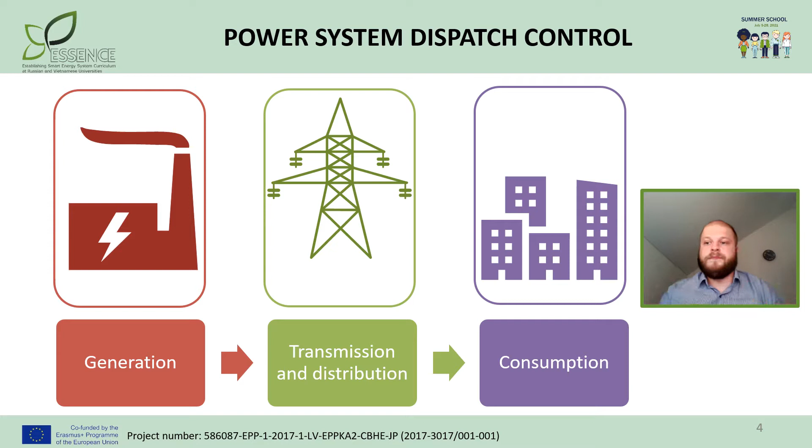Now let's talk about different power system states and some peculiar features of power system operation, because it provides a more detailed understanding of what actually are the requirements imposed for energy management systems and SCADA systems as well.

So let's start. In the normal operation state, typically all operation constraints of the power system are satisfied, indicating that generation is adequate to supply the existing total load demand and that no equipment is being overloaded or damaged for some reason. In these states, power generation reserve margins are sufficient to provide an adequate level of security with respect to stresses to which the system may be subjected, like short circuit current, extreme weather conditions, whatever. If the security level falls below some threshold of adequacy, or if the probability of the disturbance increases in some circumstances, then the system enters the alert state.

In this state, all constraints will still be satisfied but existing reserve margins would be such that some disturbance could result in a violation of some constraints. For example, equipment would be overloaded more or less severely above its rated capabilities. In insecure alert state, preventive actions can be taken to restore the system back to the normal state. If a sufficiently severe disturbance takes place before such preventive action can be taken, the system enters the emergency state.

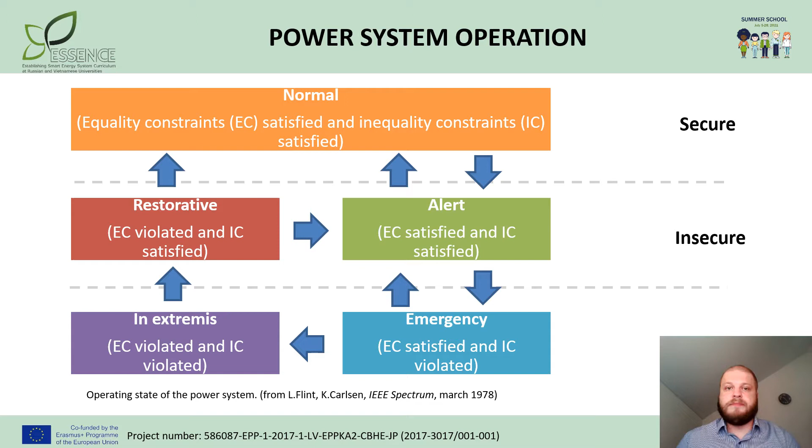The electric power system is undergoing dramatic transformations. Actually, you've learned about it a lot within the framework of multiple video lectures within the framework of our summer school. And it's worth noting that the emergence of renewable energy sources reflects these transformations. However, integrating these resources into the electric grid has proven to be difficult for two main reasons. These resources are uncertain and distributed.

When the power system increases in size, the number of substations, transformers, switchgear, and so on, their operation and interaction become more complicated. So it becomes essential to monitor this information simultaneously for the total system, which is called the energy control center. It's just like the building, the control room, where the power dispatch control engineering staff provides monitoring and control of the power system state.

A fundamental design feature of the dispatch control center or energy center is that it increases system reliability and economic feasibility. In other words, energy management is performed at the control center called the system control center, covering all of the possible issues dealing with conventional technologies like thermal power plants, network management, operation, maintenance, whatever, and including new energy sources which are distributed, storage, small-scale generation, renewable energy sources, and other active components of the power system.

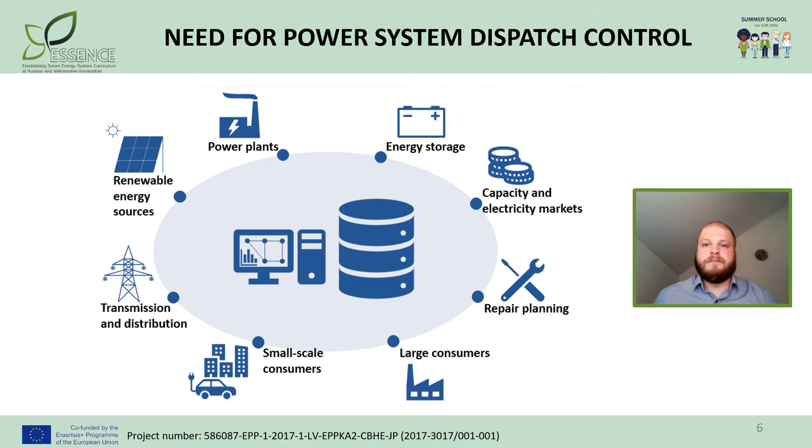A power transmission and distribution system is that portion of the power system that moves power from where it's produced to where it's consumed. Basically, it is the entire power system sans generators. The transmission and distribution system interconnects all the disparate parts of the power system and thus to a great extent determines the character of the system.

Beginning in the late 20th century and continuing into the 21st century, significant changes, advances, if perhaps not true breakthroughs, began to occur in several of the technologies that made up electric power systems. It became possible to build electric power systems fed by many more but individually smaller generation sites. No longer would there be thousands of times fewer generation stations than energy consumers. Conceivably, the ratio could be 1 to 1.

Such distributed power systems, in which power production is dispersed widely throughout the energy consumer base rather than concentrated at a few generation stations, as in a traditional power system, had different reliability, maintainability, and operability characteristics, as well as different economies of scale, which shaped their use differently from traditional power systems.

Neither type of system, traditional or distributed, is necessarily better. They are merely different. What seems clear is that the power system of the future will be neither one, but instead a hybrid mix of both, the effective interaction of transmission network and distribution network comprising multiple distributed generation sources and actively participating consumers.

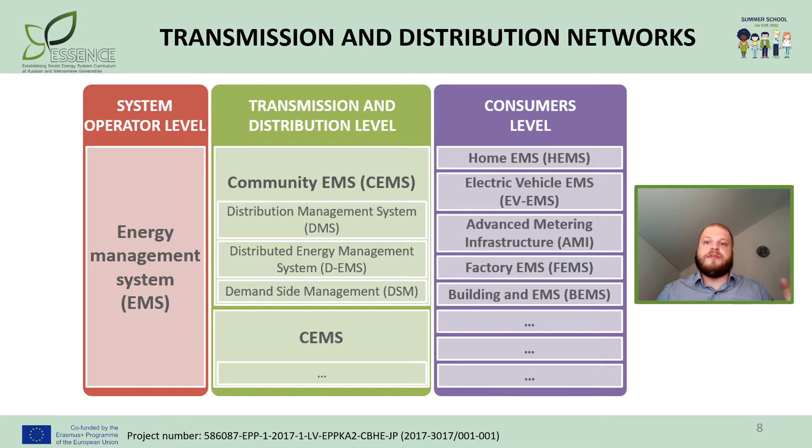So these systems are implemented at each level, and for this reason at each level these systems solve various tasks. The computer technology is referred to as SCADA EMS or EMS SCADA, and in these respects, the terminology EMS excludes the monitoring and control functions, but more specifically refers to the collective suite of power network applications and to the generation control and scheduling applications, both for generators and consumers.

Now let's talk about SCADA. Actually, SCADA is an acronym for Supervisory Control and Data Acquisition. Supervisory control and data acquisition systems are used to monitor and control a plant or equipment in industries such as telecommunications, water management, waste control, energy, whatever. A typical SCADA system comprises signal hardware, controllers, software, networks, and communications.

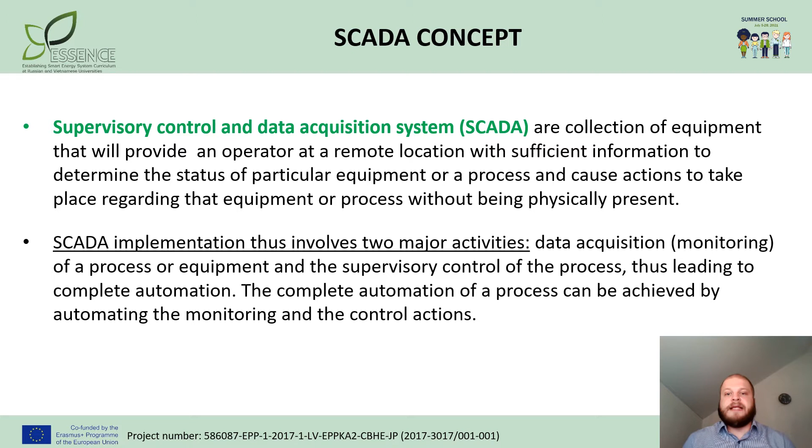A supervisory control and data acquisition system is a system in which individual messages or commands are sent to the external world. It provides host control functions for the supervisor to control and define settings of equipment or the system in general.

When talking about the SCADA concept, it's worth noting some basic functions and technical requirements imposed on these very specific systems in order to be able to implement them for power system monitoring and control. Well, the first point worth noting is data acquisition, converting, and processing.

First of all, the systems you need to monitor, I mean the power systems, are much more complex than just one machine with one output like capacity or electric current. So a real-life SCADA system needs to monitor hundreds or thousands of sensors. Some sensors measure inputs into the system, for example, water flowing into a reservoir for hydropower plants. Some sensors measure outputs like voltage, current, power system frequency.

Some of those sensors measure simple events that can be detected by a straightforward on-off switch called a discrete input or digital input. In real life, discrete inputs are used to measure simple states like whether equipment is on or off, or tripwire alarms like a power failure at a critical facility. From the point of view of the power system, a discrete input could refer to the state of the circuit breaker, switched on or switched off, which is very useful to monitor the topology, the configuration of the power system in general.

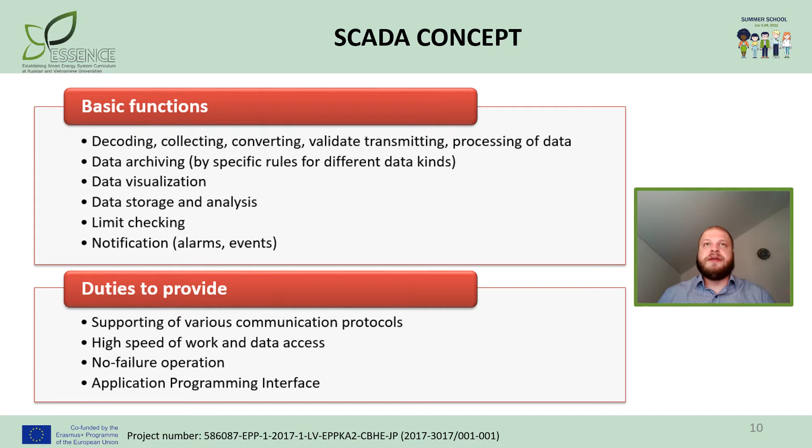The master presents a comprehensive view of the entire management system and presents more detail in response to user requests. The master also performs data processing on information gathered from sensors. It maintains report logs and summarizes historical trends. An advanced SCADA master can add a great deal of intelligence and automation to your system management, making your job much easier and your solutions more justified.

The human-machine interface is an integral part of the system that operators use to interact with SCADA, while the larger SCADA system does the work of collecting and storing SCADA data and controlling equipment. Human-machine interfaces typically feature screens and ideally user-friendly dashboards and controls. They may use graphics and visualization to make data and features easier to use and understand.

A human-machine interface is an essential element of a SCADA system since it's what you use to interact with, manage, and control the system. Without a human-machine interface, you could not take advantage of many useful features of SCADA. The SCADA system, on the other hand, provides the actual functionality. Human-machine interfaces and SCADA are often referenced together because they are part of a very big and complex system.

Just imagine the big data flow when we acquire and collect data from various sensors and monitoring systems. So it's absolutely obvious that the dispatcher, the engineering staff controlling this zone of the power system, will never be able to process and interpret all the data from all of the sensors and systems. For this reason, automated data processing, generalization, and visualization are in great demand for adequate and effective control of the power system.

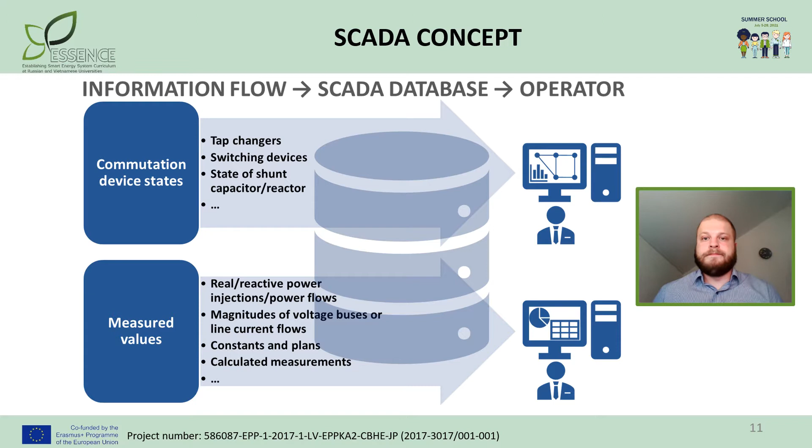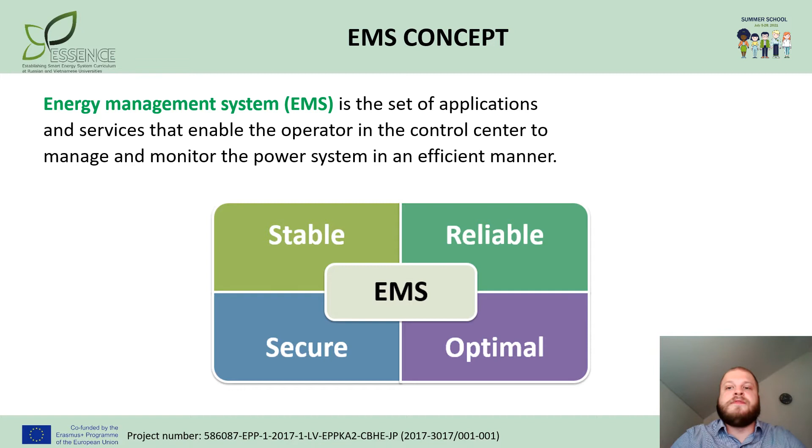An energy management system is usually a collection of computer-aided tools used by operators of electric facilities to monitor, control, and optimize the performance of the generation, transmission, or distribution system. Different computer-aided tools are implemented, from short-time control modules to scheduling or commitment of power production units on a day-week basis. EMS has the objective of maximizing system performance by monitoring and control functions, which require a centralized system of data collection and decision-making procedures.

EMS are automation systems that collect energy measurement data from the field and make it available to the users through graphics, online monitoring tools, energy quality analyzers, thus enabling the management of energy resources.

So EMS capabilities include monitoring and control of the complete power system, validation of data, monitoring power system operation mode indicators, sending control commands, and communication with power industry facilities, display of measured and computing data, operating the system within the framework of the limits, tracking some energy balance, and even restoration of the power system after emergency.

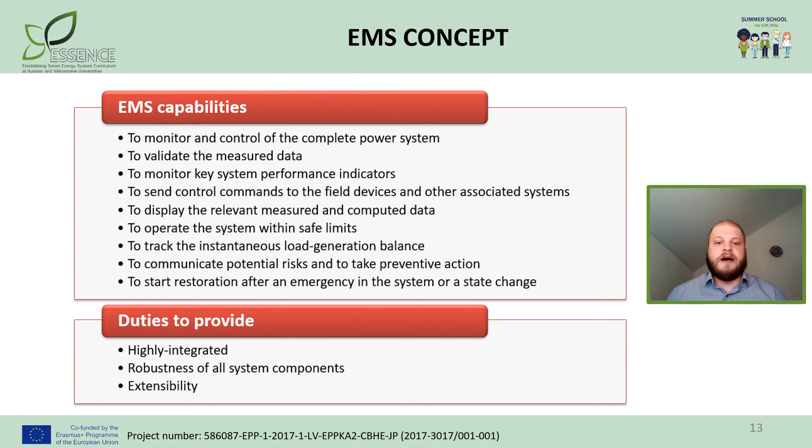Well, as I have already mentioned, energy management systems are of crucial importance not just for the power system control in emergency mode or normal operation modes, but for separate and individual power system facilities. For example, photovoltaic power plants. They are of great importance for transmission and distribution system operators, for owners of power system facilities.

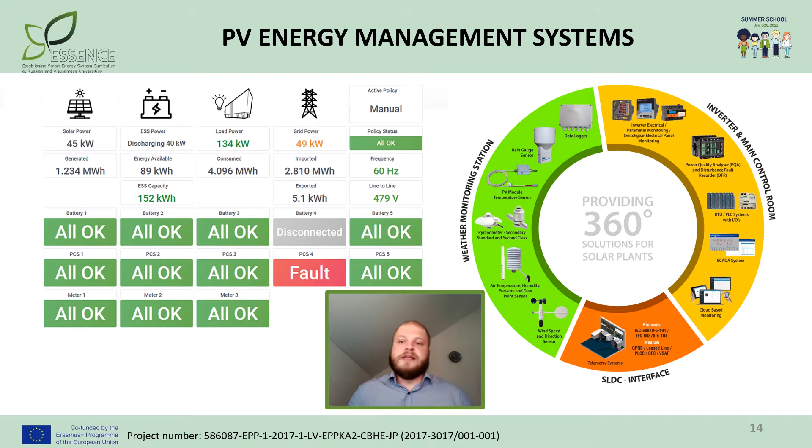If we deal with various control objects and elements within the framework of the energy management systems of the PV power plant, we may see that these are the PV panels, inverter and main control room, which controls the states of the semiconductor equipment, the weather monitoring stations, which provide us with the very important information on the weather events, weather conditions, which actually affect the operation mode of the photovoltaic power plant as well.

As I have already told, data pre-processing and visualization is of great importance for energy management systems because it is not a great deal to present raw data to a person who is responsible for controlling the operation state, who is responsible for taking decisions which have impact on the energy production, ensuring reliability and safety on power supply. And actually, that means that adequate pre-processing and user-friendly visualization of these data flows is of crucial importance for all of the existing energy management systems.

Data pre-processing is no less important than building mathematical models. Moreover, data processing is an integral part of EMS systems. In many cases, this stage is most important for the successful solution of the problem under consideration. So whatever the problem could be, like forecasting, control of the state, putting some controls and commands, whatever.

So data preparation can be divided into the following stages. It's data selection, cleaning, transformation, analysis, and visualization, as well as feature engineering, which stands mostly for machine learning. Generally, the process of data preparation is iterative, and there is no strict order to follow.

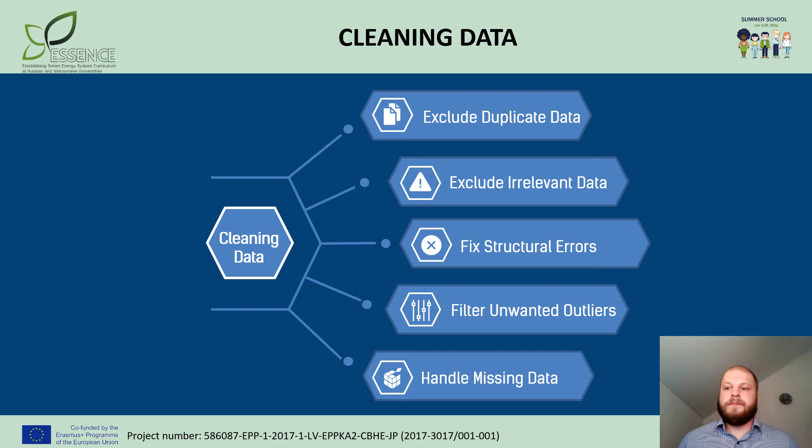Well, now let's talk about missing data. If there is a lot of data, but there are few missing values, you can simply discard some objects with missing values and or discard a gapped feature, remove columns. It's up to you. But if it is not the case, or for example, the very specific measurement is of great importance, then you need to fill in the gaps.

There are several approaches how to do this. To choose the most appropriate value to fill each gap, you can choose mean, median, or mode. Another simple approach is to treat gaps as a special type of value. More sophisticated but potentially more efficient are some unsupervised missing value recovery algorithms, such as detecting the most similar objects and using their values.

And finally, we have the option of doing nothing with the gaps just by using algorithms that are initially designed to allow gaps in the initial data. But anyway, missing data issue is of great importance for EMS systems as well.

Well, now let's move on to data transformation issues. First of all, data can be divided into numerical and categorical types. For numerical data, a change in their dimension, distribution, or more complex types of transformations can increase the importance of the parameter for the energy management system. For categorical data, the task is usually to represent it numerically.

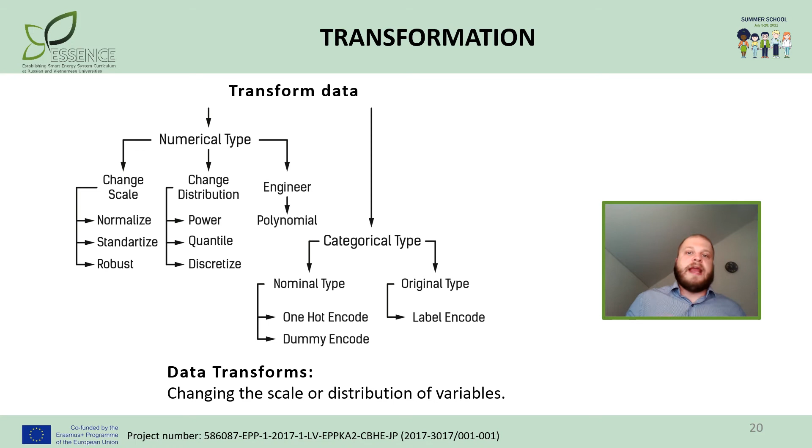Feature selection falls into three general classes: intrinsic methods, filter methods, and wrapper methods. Actually, feature selection is of great importance because at this stage you identify the relevant demanded data which will be used by your energy management system to produce the desired output. Intrinsic methods have feature selection naturally incorporated with the modeling process. Various filter and wrapper methods work to marry feature selection approaches with modeling techniques.

Well, actually, the data exploration and feature selection based on their importance is of crucial value for the energy management systems implementation because you define what the features are used for and what features are important in order to get the desired result of your subtasks which you are attempting to solve within the framework of monitoring, control, whatever you deal with for a specific object under consideration.

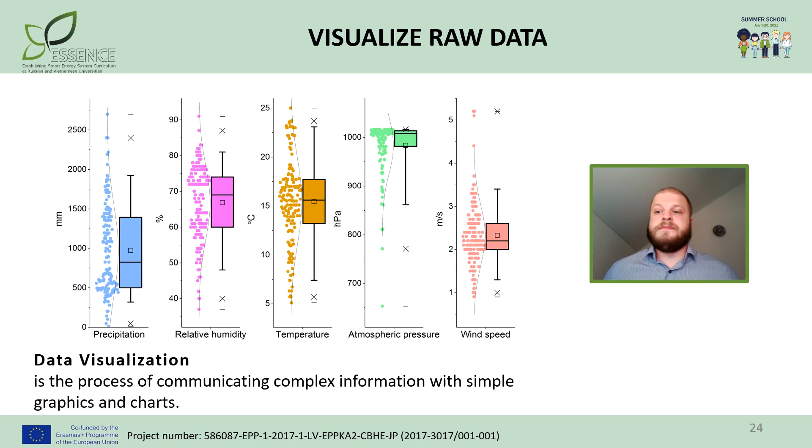Before taking on the problem of photovoltaic power plant forecasting, first of all, we identify the important values within the framework of the input data set. These are adjacent power network parameters, like switched on and switched off power transmission lines, because they may impose additional constraints on the photovoltaic power plant output in terms of providing generation of the rated capacity of the PV power plant if we have sunny weather, for instance.

Then we have weather data, which is of crucial importance for our task as well, because clouds, fog, or some sort of storms impact the generation capacity of the photovoltaic power plant greatly. We have to keep in mind the solar power plant configuration, because even service and maintenance actions like taking an inverter for maintenance disconnect a part of the PV panels, and that means we are no longer able to produce the rated capacity of the PV power plant. So we have to take this into account as well.

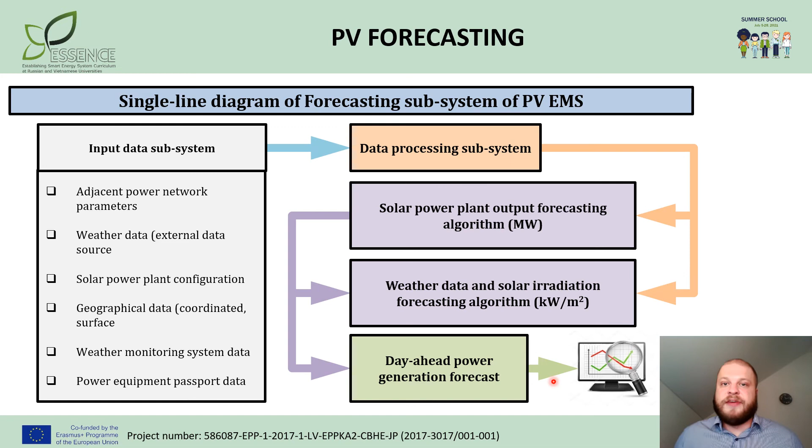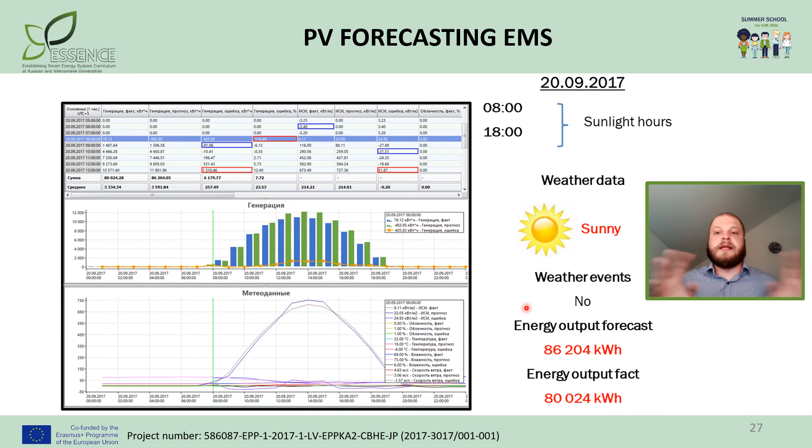Well, now let's talk about data flow within the framework of the photovoltaic power plant. Let's consider the different data sources associated with the PV panel. For a PV panel, we have temperature sensors, which provide data on the temperature of the surface of the solar panel, which actually has a great impact on photovoltaic panel production efficiency.

Within the framework of the PV power plant, we have the horizontally installed irradiance pyranometer and a solar irradiance pyranometer which is tilted in the same plane as the PV panel. We have the inverters, which provide us with the corresponding data of the electrical currents on the DC and AC sides of the PV power plant as well.

Moreover, at the photovoltaic power plant, we have weather stations, which provide us with the relevant data of current wind speed, current humidity, temperature, whatever. So it means that we have many data sources within the framework of the local power plant, which may be useful for us to tune, adjust, and even design the energy management system.

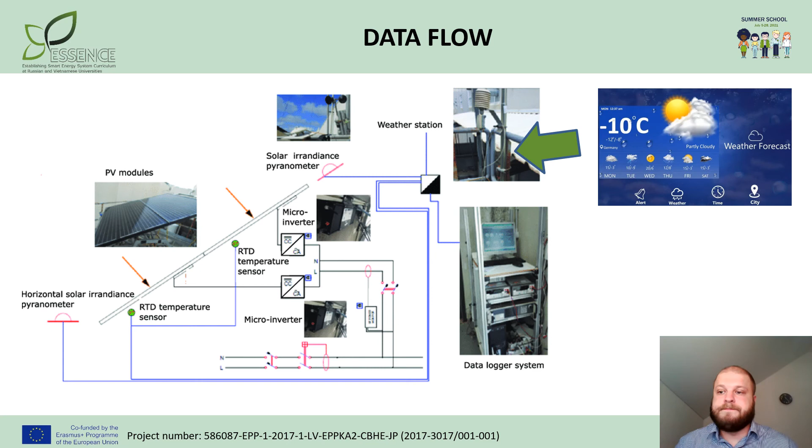Moreover, considering external data sources, we implement external weather forecasts, which may be of great importance for us when designing and implementing photovoltaic power plant forecasting systems. Being more specific about the characteristics of external data sources, we have to select, combine, and compare with each other different data sources.

And these numerical weather prediction models have different characteristics as well, like different resolution, different models of taking into account the atmosphere of the Earth, whatever. Moreover, it's a great deal to take into account the distance of the photovoltaic power plant from the nearest meteorological station. This will give us at least a general understanding of whether we can rely on the data that we acquire from external weather providers or we cannot do it at all.

Of course, we have to consider organizational issues like using the forecasting retrospective, because when you create the model, you may use actual data, but when you implement the model, you have to use forecasting data, which may be a little bit different. For this reason, analysis of the forecasting retrospective is of great importance. And for both of the weather providers, the retrospective of the forecasts is just a contract-based data supply option.

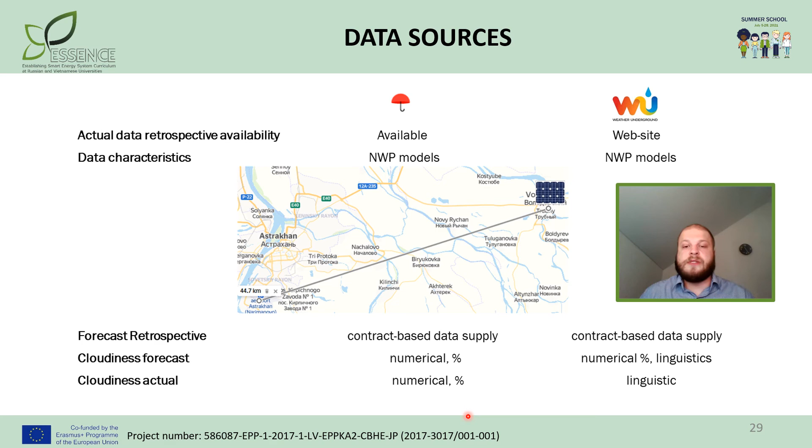So we have to analyze specific features of cloudiness forecasts and specific features of, for example, cloudiness actual values accuracy. And what is actually the value when we represent the cloudiness, like is it given in percentage or in linguistic characteristics? It depends on the data source that we select for each specific problem under consideration.

the horizontally installed pyranometer. And we may have errors associated with data contradictions, because sometimes the greater cloudiness may correspond to the greater irradiation, and the lower cloudiness may correspond to the lower irradiation, which is actually impossible from a physical point of view. And for this reason, data analysis, data pre-processing, and selecting relevant data sources are of crucial importance for energy management systems and for solving each specific task within the framework of implementing this energy management system in practice.

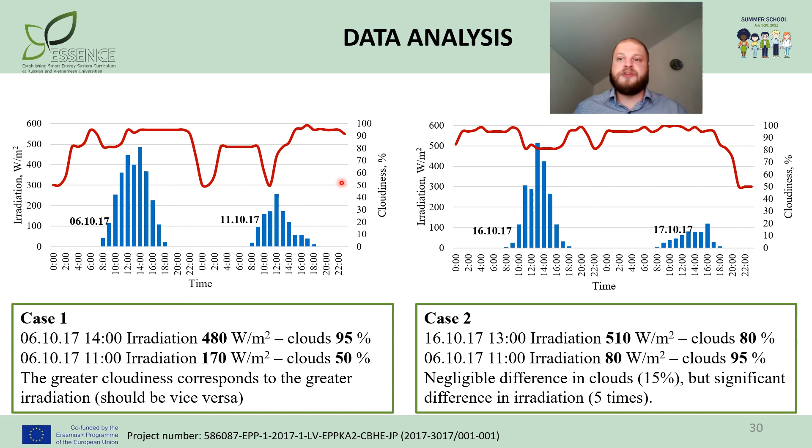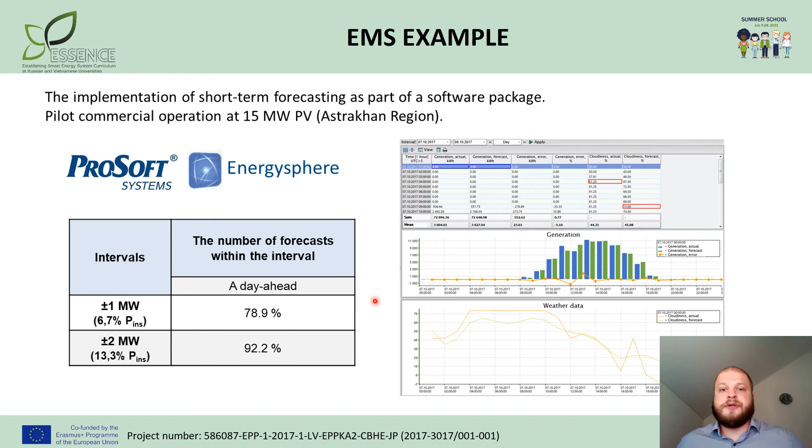Well, now we are smoothly coming to the lecture learning outcomes. First of all, I would like to state that energy management systems are of crucial importance for automated control and monitoring of power system facilities. And it is of crucial importance both for big power systems in general with great dispatch control centers and for small power system facilities, because at each level of hierarchy in the power system, you need to control different values and you need to provide an efficient decision supporting tool for the engineering staff.

Data flow in energy management systems is arranged from various internal and external sources. And what we have to do is to select the relevant sources and to think about data processing as well. Actually, the latter one is one of the crucial stages of EMS system design. And I would say that data issues, combining data sources, pre-processing, visualization, are some sort of a heart of an energy management system, and it should be treated in a proper way. User-friendly visualization in energy management systems ensures effective interaction with the user, and actually it is one of the great issues to be dealt with.